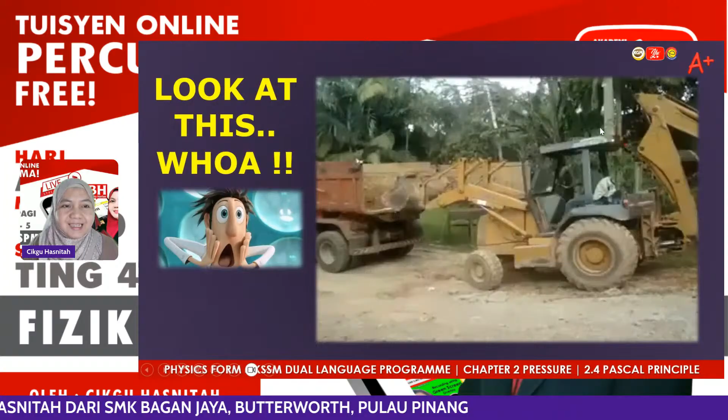Okay. So to begin this lesson, let us take a look at this short animation on how it is possible for this vehicle to be placed on top of this truck with the help of a hydraulic system, or the applications of Pascal principle. And if you know the name of this vehicle, you can type its name in the live chat.

Yeah, I want you to look at this structure, students. This is the part that we are going to discuss later on. It looks heavy, right?

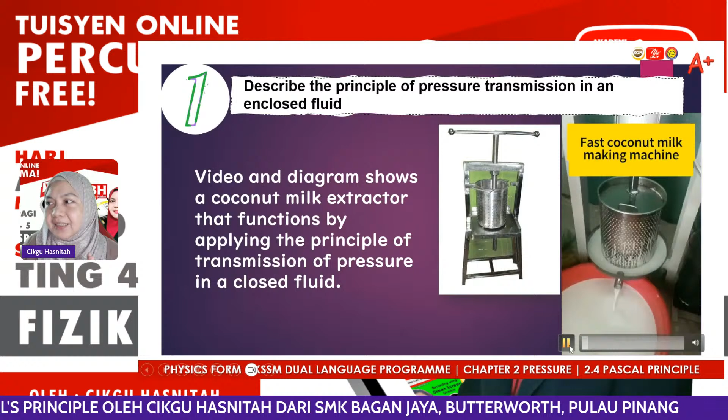And now I want you to observe this second animation. This is another example of applications of a hydraulic system in our daily life, in a coconut milk extractor. See, when the thing is pushed in, the coconut inside will get pressed and finally the milk comes out from down here. So the video and diagram show a coconut milk extractor that functions by applying the principle of transmission of pressure in an enclosed fluid.

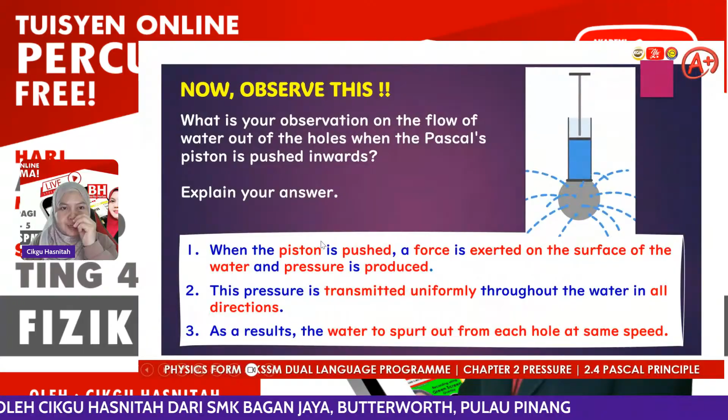All right, students. Now, what about this? If you look at this GIF, what is your observation on the flow of the water out of the holes when the Pascal piston is pushed in? So this is the Pascal piston on top. Once we push it inward, you can see the water starts to spurt out from the holes around this container. So here, how can we write our observation?

When the piston is pushed down, what happens? Actually, we apply a force to that area. So by that, pressure is produced. Remember, pressure is force per unit area. So when we apply a force to a unit of area, pressure will be produced. And what happens to this pressure?

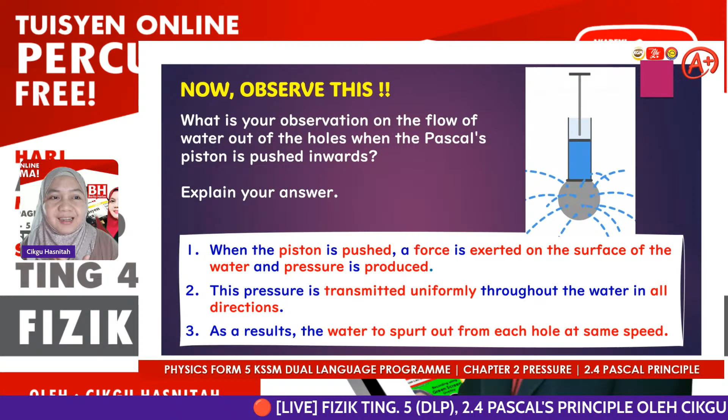So P1 is equal to P2, and P1 and P2 can be written in the form of F1 divided by A1 and F2 divided by A2. So this equation becomes F2 divided by A2 equal to F1 divided by A1. So this is the Pascal formula. And students, the Pascal formula will be given in the formula list in paper 1 and paper 2. Okay. So that settles the first learning standard: how to describe transmission of pressure in an enclosed fluid.

Okay, now let us take a look at the second learning standard.

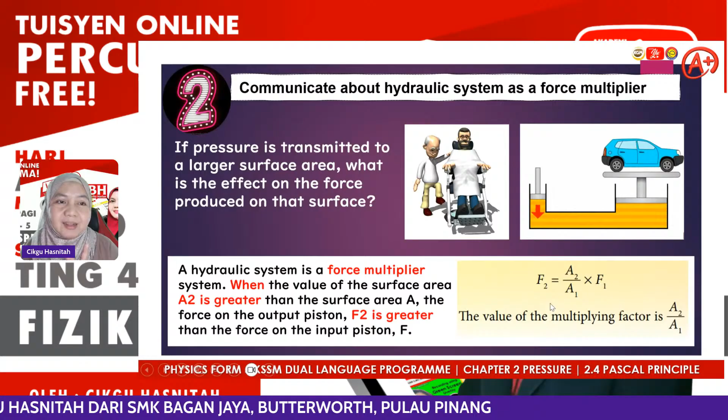Alright, so are you clear so far?

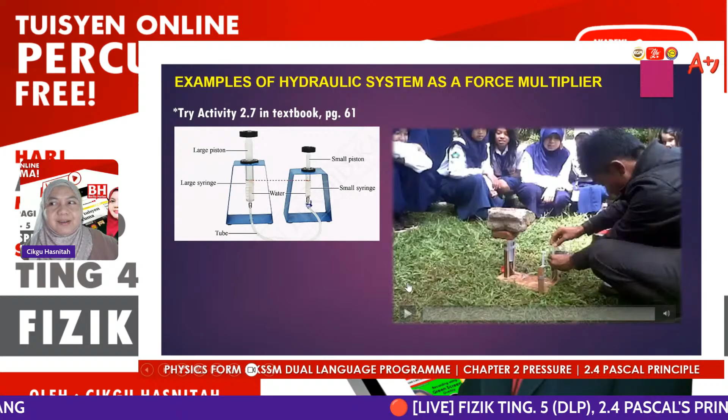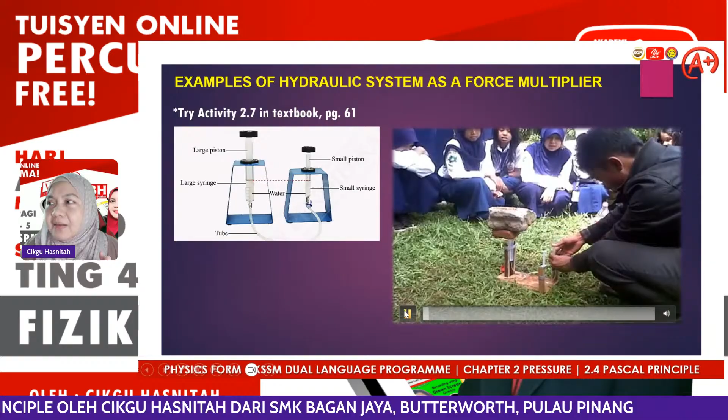Okay, now let us take a look at one more video, an example of an activity conducted in school to explain to the students how Pascal's principle works. Okay. So what does this teacher do, student? He places a few bricks on the output piston, and then here he presses on the input piston with his hand. So he applies a small force here.

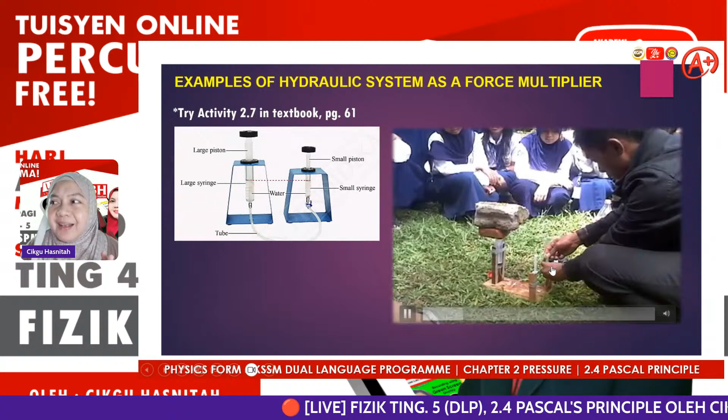So finally, the pressure produced at the input piston will be transmitted equally throughout the liquid along this tube. And finally, the pressure reaches the second piston, the output piston, then it will produce a greater force which can lift this brick or stone upwards.

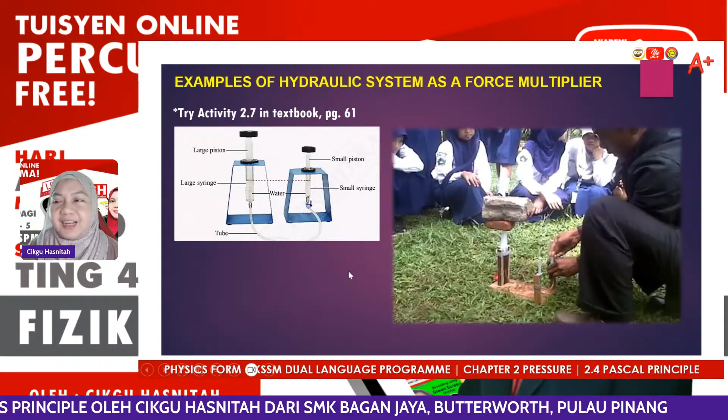Right? Okay. So students, that settles the second learning standard: how a hydraulic system can act as a force multiplier. So again, from a small input force, we can produce a larger or greater output force at the end. Okay, now let us move to the third learning standard.

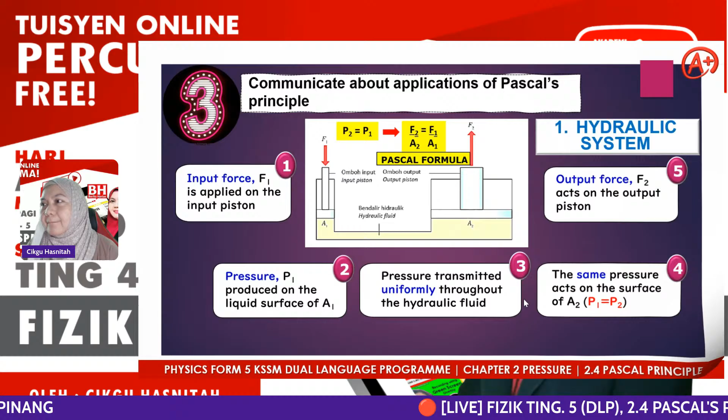Okay, it looks like I have some technical error here. My slide does not want to move. So I'll try to fix it soon and we'll be back shortly.

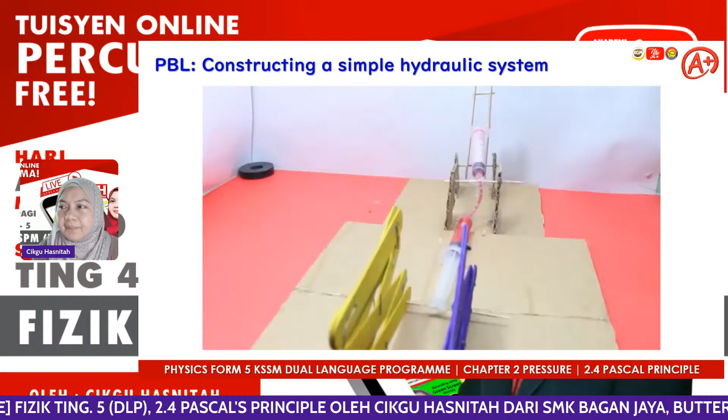So we put 3 small holes in each of the ice cream sticks and join them using a wire. And now is to place the piston in its position. So it looks like our simple hydraulic system is ready. Now it's the time to test its function.

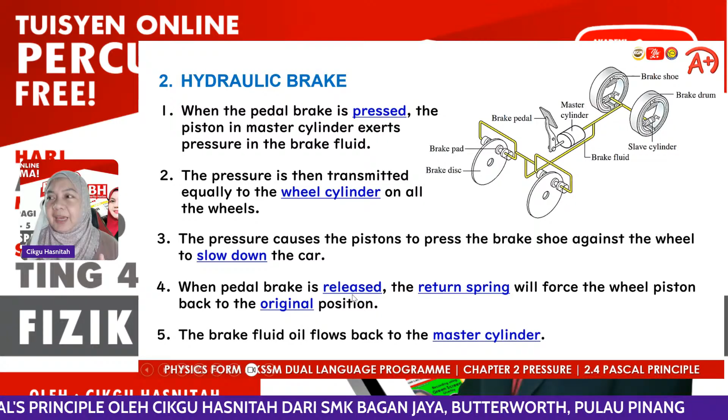So the return spring will force the wheel pistons back to their original position, and by this the brake fluid will flow back to the master cylinder. Okay, that is the sequence of what happens from the moment we press the brake pedal until we release our feet from it. Okay, then the third application is the hydraulic jack.

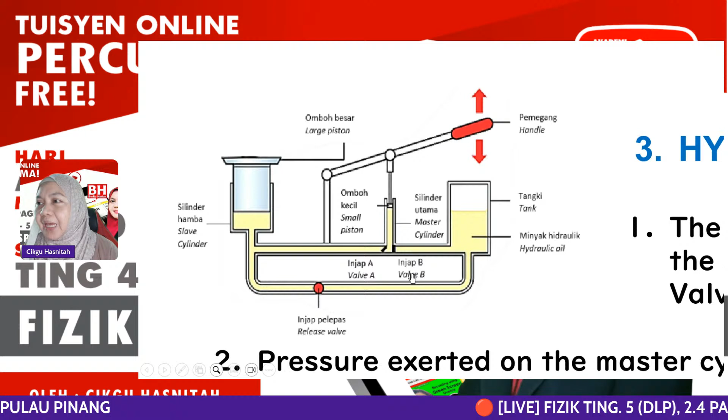So first, this is the structure of the hydraulic jack. If I zoom in for you, you can see there is a handle on top, and this is the master cylinder. And students, this is the small piston. Okay, on the master cylinder, we have two valves there, valve A and valve B. The release valve is down here, and this is our output piston. Okay, the slave cylinder. This is the part that we place under the car to lift the car. So the car will be lifted at this area.

Right? And there is a tank which stores the hydraulic oil. Okay, what happens, students? How to use this hydraulic jack? Bagaimana nak guna hydraulic jack? So first, when the handle is pushed down, what happens? The force will act on the small piston in the master cylinder, and at this time valve A will be open. Okay, valve A akan terbuka manakala valve B akan tertutup.

Okay, so then pressure is exerted on the master cylinder and transmitted uniformly throughout the hydraulic oil. So since valve A is open, the pressure will be transmitted to the left uniformly. Okay, and then a large force is produced. Finally, it will produce a larger output force here and push the piston upwards. Okay, it will push the output piston upward.

Okay, then students, what happens when we open the release valve down here? When the release valve is open, the oil will flow back into the tank. Okay, minyak akan masuk semula ke dalam tangki while the larger piston will be lowered down. Okay, so piston ni akan diturunkan kembali kepada kedudukan asal. Then the handle needs to be pushed up and down repeatedly to lift the car to a higher level.

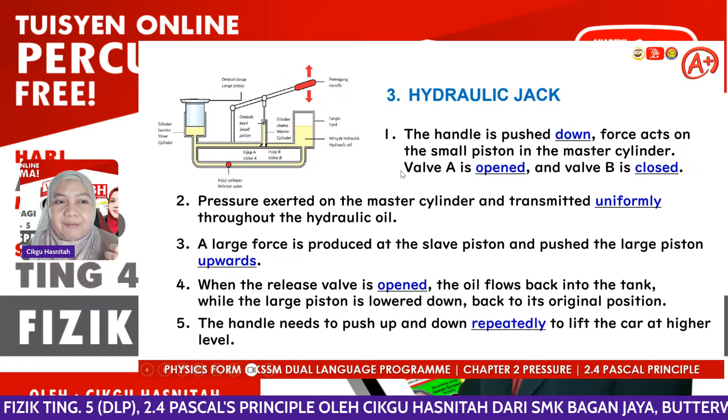Alright, okay. So now let us take a short break before we go to the final learning standard on doing exercises and solving problems related to Pascal's principle.

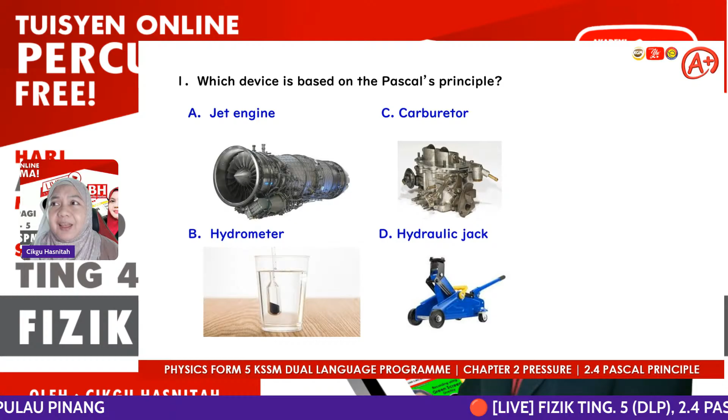Alright. Okay, students, the first question. Simple, very easy. Soalan objektif, multiple choice. Can you tell me which one is the correct answer? Which of these devices operates based on Pascal's principle? Alat yang mana beroperasi menggunakan prinsip Pascal? Is it the jet engine, hydrometer, carburetor or hydraulic jack? Which one?

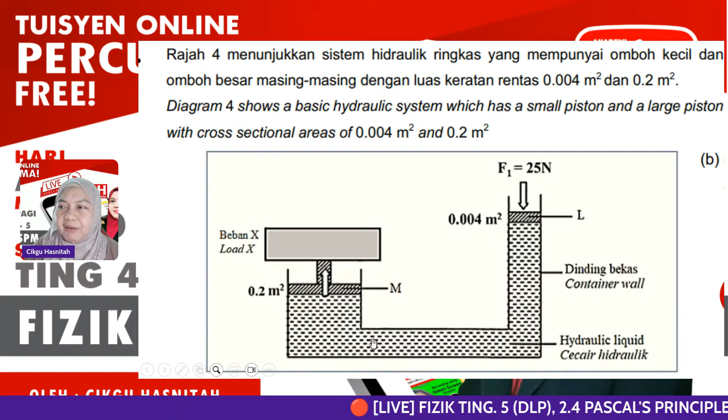From our understanding, when we apply a small force to this area, pressure will be produced, and this pressure will be transmitted equally and uniformly throughout this hydraulic liquid, and finally the pressure reaches here. Pressure at the first piston equals the pressure at the second piston. So finally, it produces a greater output force which is able to lift load X up. Simple. The story is the same again and again. The question is: find the weight of load X.

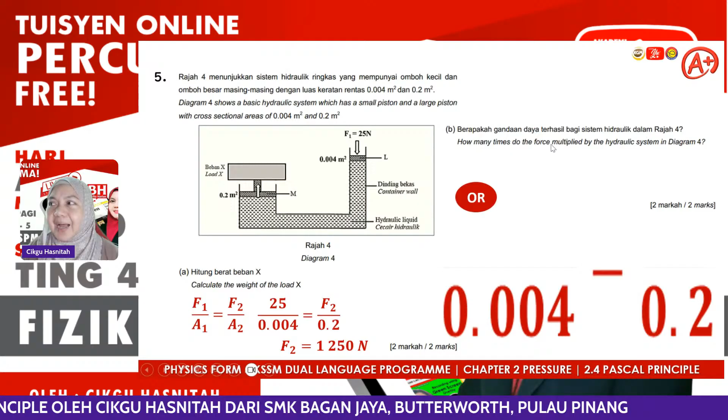You can see, from 25 Newton, a small force, we are finally able to produce 1,250 Newton at the output piston. Alright, now students, how many times is the force multiplied by the hydraulic system? From 25 it becomes 1,250 Newton.

How many times has the force been magnified?

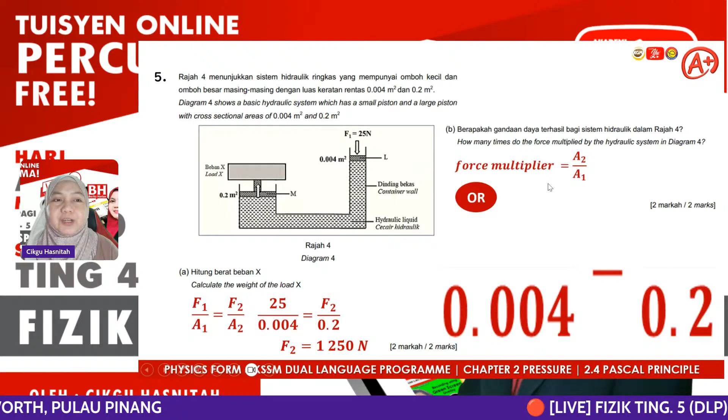So the answer, students, if you see. Okay, so how to find the force multiplier? Okay, you have 2 options. Either you find the ratio of the area, A2 to A1. So it will be 50 times. Okay, the force has been multiplied 50 times.

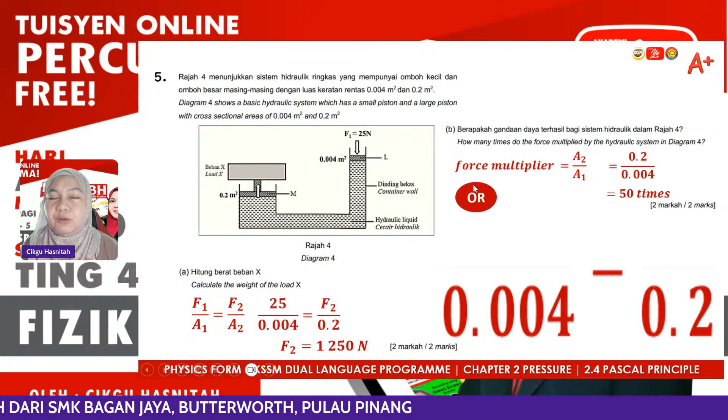Okay, or you can use the second ratio, the ratio of the 2 forces, output to input force. So output force 1,250, the input force 25. So the answer will be the same, 50 times.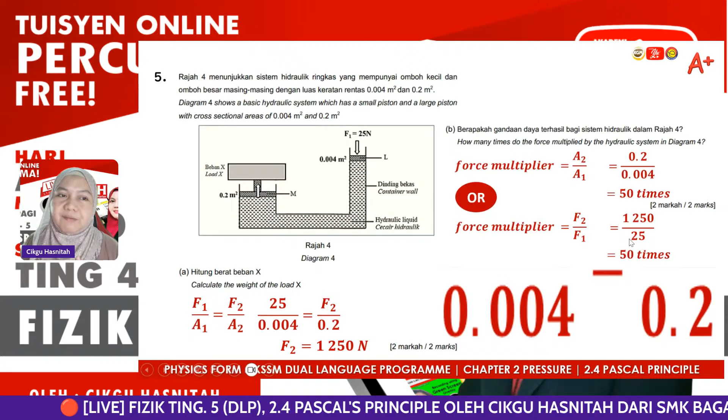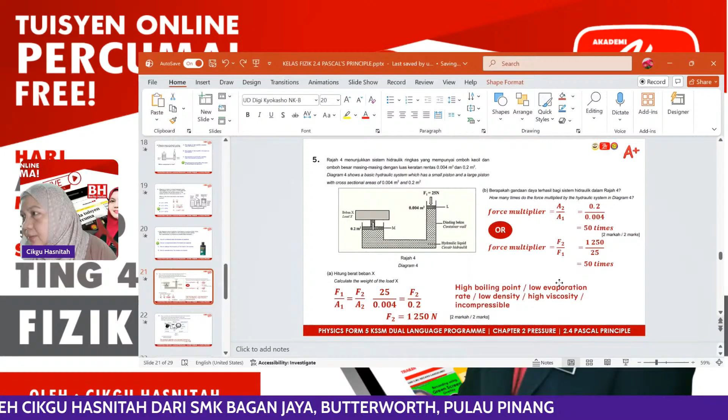Alright, okay, settled. Kenapa ada bahan ni di sana tertutup jawapan dia? Sorry. Okay, so this one, there's one question here. I don't know why it is. Cikgu tutup sebentar ya. Kenapa dia ada jawapan di sana tertutup. Okay. Okay, ada satu soalan lagi di sini tapi saya rasa dia sudah tertutup.

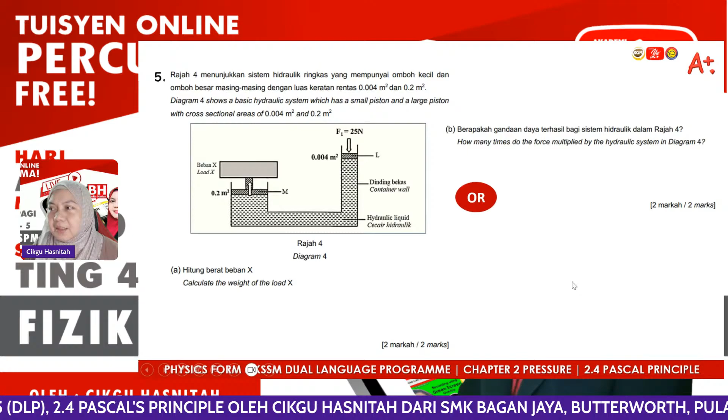Okay, never mind. Okay, for this one, the question asks what is the characteristic of the liquid that must be used in a hydraulic system. So the answer, first you can say it must have a high boiling point, so it won't evaporate easily, or it has a low evaporation rate, or low density liquid, high viscosity liquid, and the most important, the liquid must be incompressible. Okay, so this is the characteristic of the hydraulic fluid which must be used in this system.

You can write any of it. Kalau soalan satu maka bagi satu saja jawapan. Kalau soalan dua maka boleh bagi lebih daripada satu jawapan.

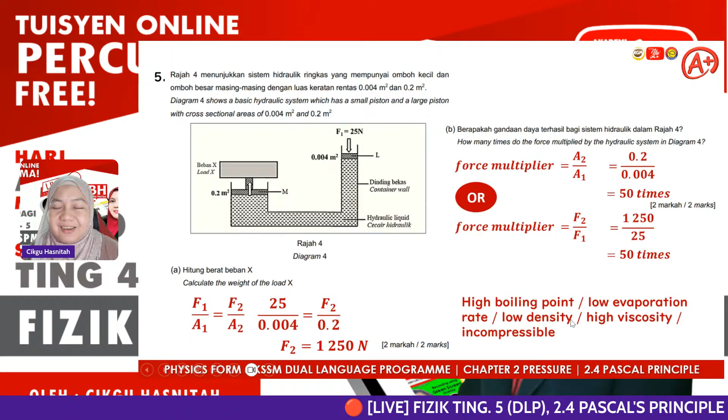Alright, okay. Next, students, question 6. Now we have diagram 2. It shows a hydraulic brake system. Dalam soalan ni, anda diberikan rajah menunjukkan sistem brake hydraulic. Okay, this is the master cylinder, meaning our input piston connected to the brake pedal. And here is our slave piston, connected to all 4 wheels.

Okay, first, state Pascal's principle. From our discussion earlier, Pascal's principle states that the pressure applied to an enclosed fluid will be transmitted uniformly in all directions in the fluid.

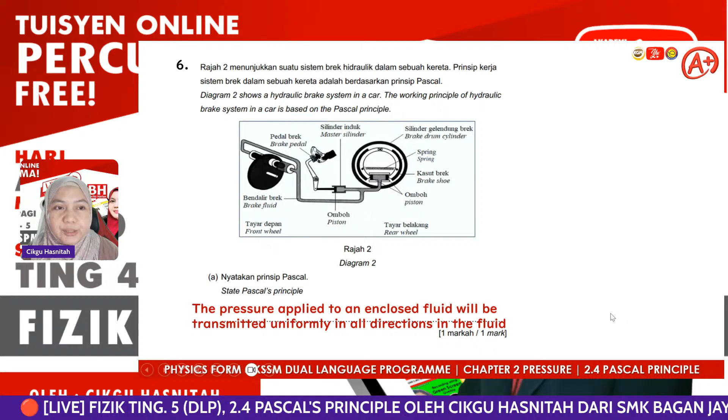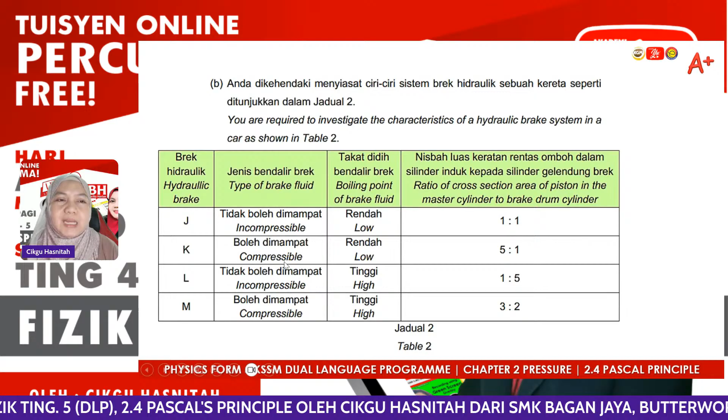Alright? Okay, simple. Then we go to the next question. Here you are given a table. We have 4 types of hydraulic brake, J, K, L, and M, and 3 characteristics. Type of brake fluid: you have 2 choices, compressible or incompressible. Second, the boiling point of the brake fluid should be high or should be low.

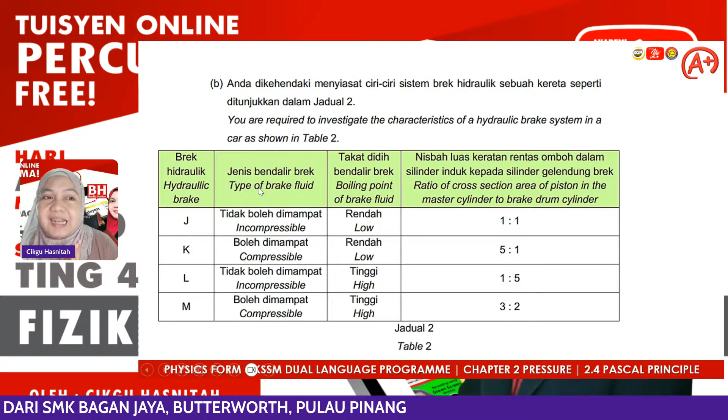We don't want the liquid to boil easily, so it will be easily evaporated. We don't want that. So the boiling point needs to be high and the brake fluid must be incompressible. Then what about the ratio of the cross-sectional area of the master cylinder piston to the brake drum cylinder? The master cylinder is the input piston. The brake drum cylinder is the output piston. The ratio must be which one?

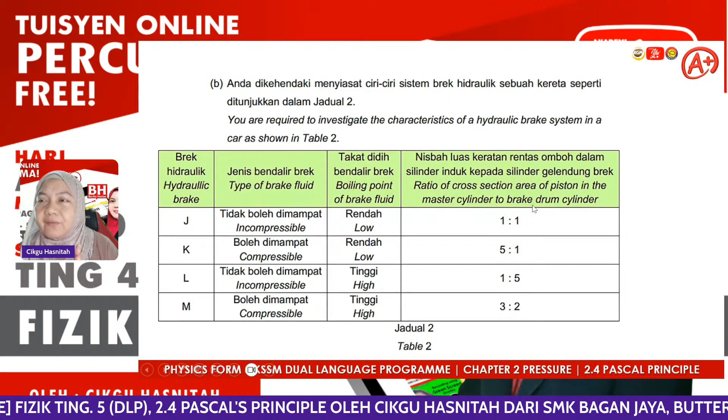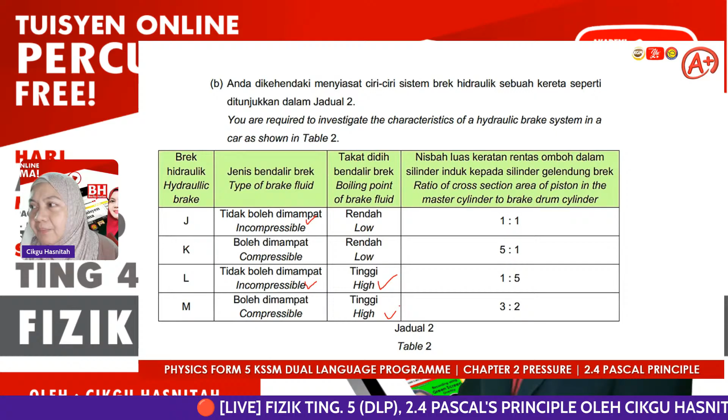1:1 means the size is the same. That's wrong. 5:1 means the input piston is greater, the output piston smaller. This is also wrong. So we want 1:5. The size of the master cylinder is smaller, the size of the output piston is greater. So we choose the 1:5 ratio. So which one is the answer? We want an incompressible liquid with a high boiling point and this ratio. So clearly the answer will be L. The best choice of hydraulic system is L.

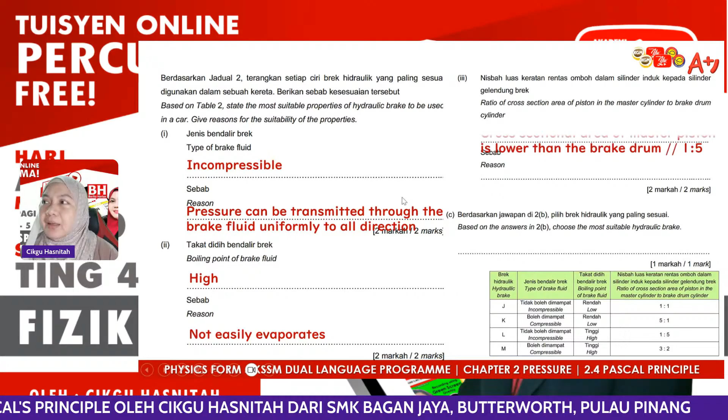Okay, so how to explain? Type of brake fluid: incompressible, so that pressure can be transmitted through the brake fluid uniformly in all directions. Second, the boiling point should be high so that it will not easily evaporate at high temperature. The cross-sectional area of the master cylinder must be lower than the brake drum, or you just take 1:5. Reason: to produce a larger output force at the output piston. And finally, which one is the best choice? It is L.

Okay, student, next. Okay, a long essay question.

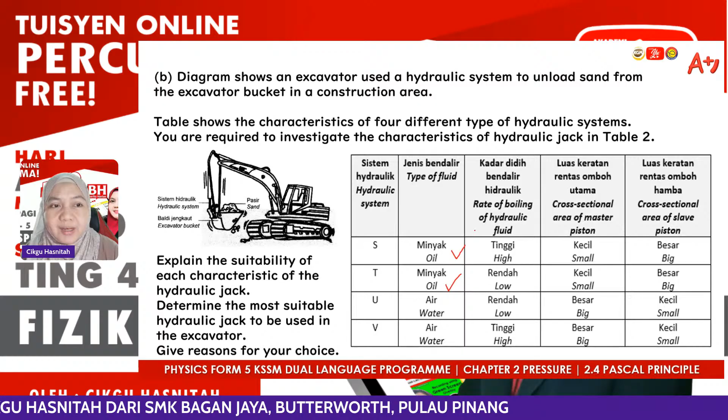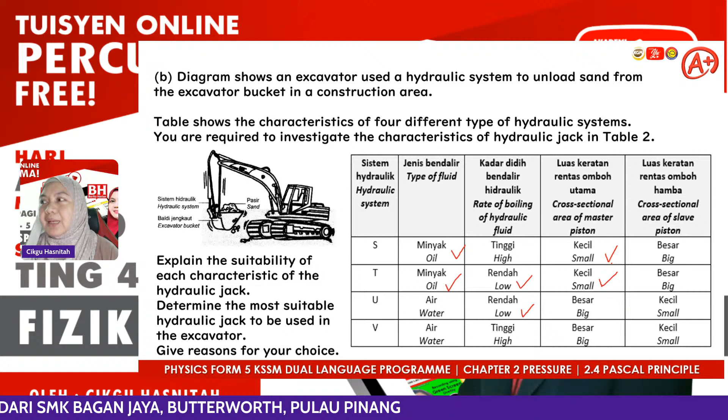Low. Right? And then the cross-sectional area of the master piston. Master piston is input piston. The size should be smaller. So yes, smaller. So we choose small. Okay, and finally, the cross-sectional area of the slave piston. Slave piston is output piston. The size must be greater so that we will produce greater output force. So big. So obviously you can see the answer should be no one but T.

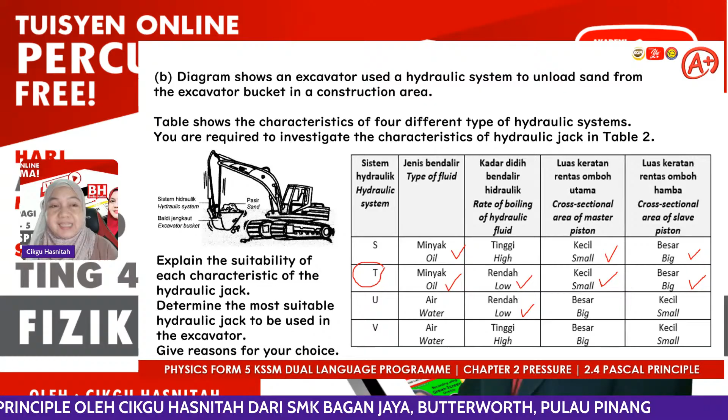Okay, none but T. Okay, let us explain this in a form of table. In the exam, you are highly recommended to place your answer in a table. It doesn't matter if you do 2 columns or 3 columns as long as you write back the characteristic. Okay, the first mark, type of fluid, oil. Why? Incompressible. Rate of boiling of hydraulic fluid should be low. Why? Not easily boiled or not easily vaporized under high temperature. Cross-sectional area of master piston, small. Use the same terms used in the table.

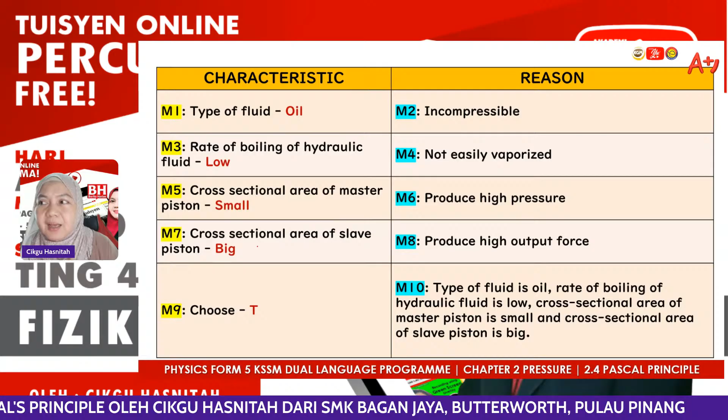Okay. You just write everything written in the table. Oil, low, small. Reason, produce high pressure. So this high pressure will be transmitted to the second piston. And the cross-section of the slave piston, output piston, should be big. So finally, we can produce high output force. So by this, we choose T for all these reasons. Type of fluid is oil, rate of boiling of hydraulic fluid is low, cross-sectional area of master piston is small, and cross-sectional area of slave piston is big.

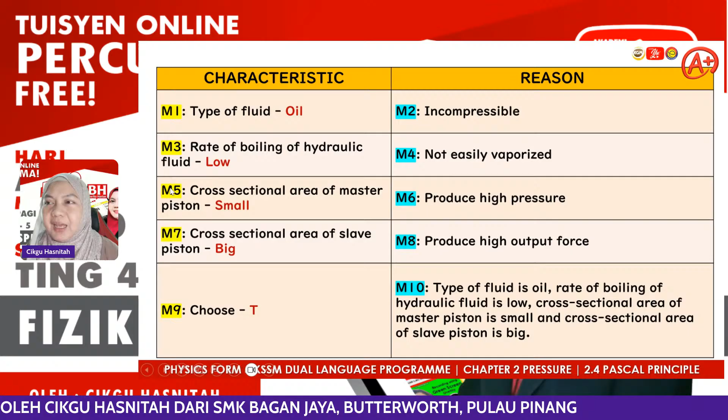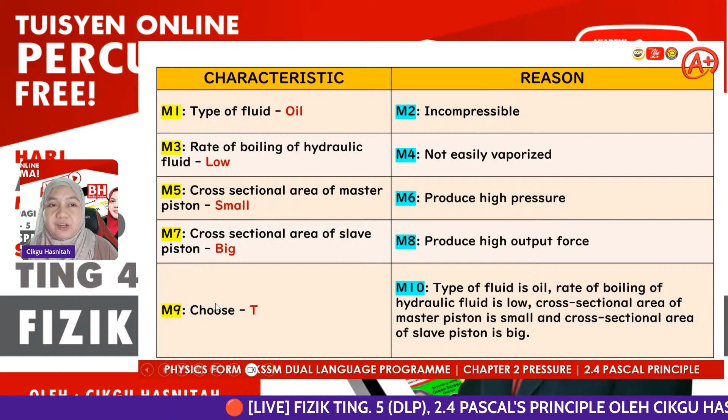Okay, habis 10 markah. So, kamu tengok sini M1, M3, M5, M7. This is the mark for the characteristic and the reason is given an even mark, M2, M4, mark 6 and mark 8. The correct answer will be given mark number 9 and the combination will be rewarded as mark 10.

Alright, okay. So done, student, with the SPM format practices. Now the last part of this lesson is the discussion of formative practice 2.4. If you are having homework on this 2.4, I think this is the best time for you to figure out the answer for each. Okay, first, state Pascal's principle.

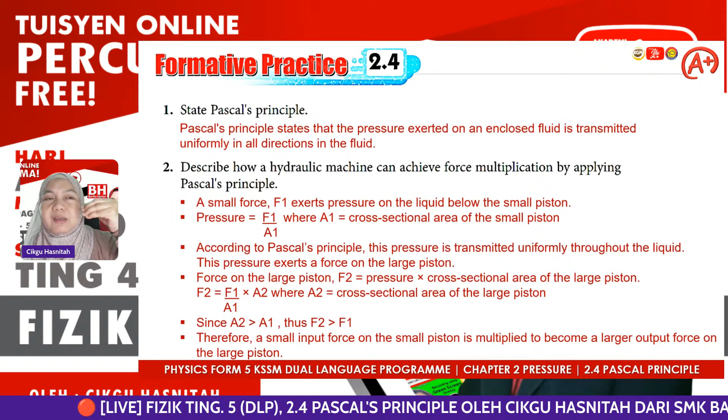Okay, I hope you're clear with the story. From the first action, we apply a small force on the input piston and finally we produce a greater force at the output piston. So we say the input force has been multiplied. A small input force finally produces a greater output force. Right? Okay, good. Third question.

Third question, students: in a hydraulic system, an input force of 4 Newton, you can highlight, input force, so it should be F1, 4 Newton, acts on a piston with a surface area of 0.5 centimeters squared. This is A1, the area of the input piston. Calculate the output force F2 on a piston with a surface area of 6.4 centimeters squared. This is the area of the output piston.

So simple. Pascal formula: F1 divided by A1 equals F2 divided by A2. You must know what we are looking for. We are looking for the output force, F2. Substitution: F1 is 4, A1 is 0.5. Here both are in centimeters squared, so you don't have to convert into meters squared. Leave it, no problem. A2 is 6.4. So finally, F2 is 51.2 Newton. Again, a small force of 4 Newton finally produces a greater force of 51.2 Newton at the output piston.

Okay. Then, number 4, the last question for today.

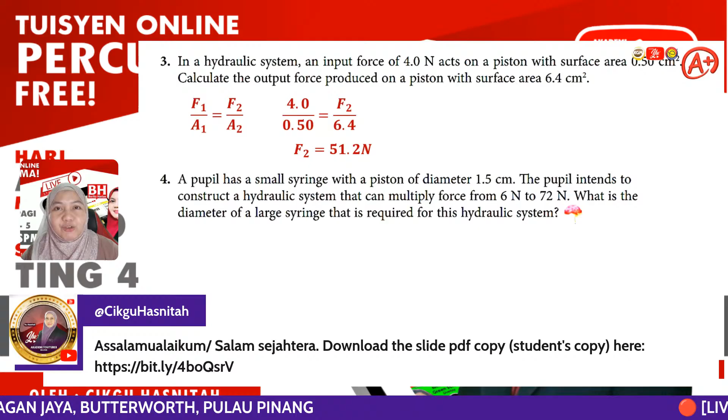Okay, you have about 1 minute to go to figure out the answer for question 4 before I share the solution. Alright?

Okay students, time's up. So are you done?

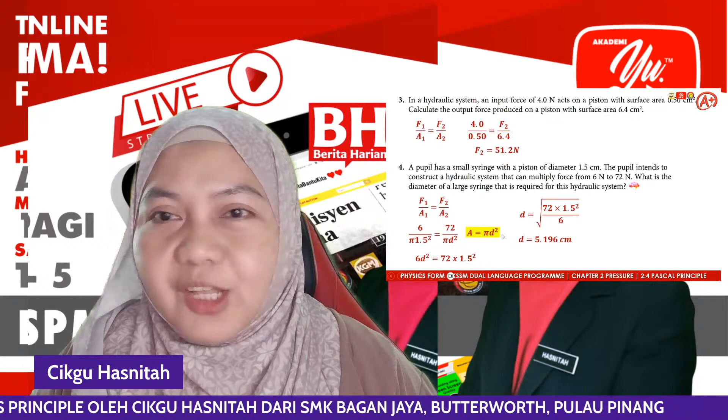Pi d squared. It is not pi r squared. Okay, area is pi r squared. Betul. Okay, Eloy, sekejap kita tengok. Area is pi r squared. Okay, betul lah. Okay, so kita betulkan. Sorry sini. Okay, thank you Eloy for correcting me. So kita betulkan dekat sini. So pi r squared. So this one should be half, 0.75. Okay, ini nanti anda betulkan. Can you calculate the correct answer, Eloy?

So this one is R, D is diameter, area is pi R squared. Is it area? Okay, so yes, this is R. So this one is 0.75. Is it? Yes, 0.75. Okay. Here is 0.75. Okay. Okay, then the correct answer. So by this the correct answer is, okay, I don't have a calculator with me now. Can someone calculate for me the correct answer for this? Okay, there's some minor correction there, students.